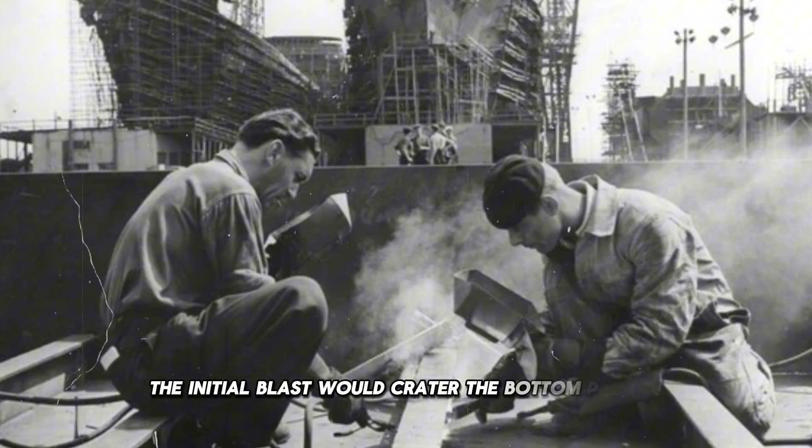By April 1944, salvage teams in the Mediterranean were seeing consistent patterns in how LSTs broke apart after mine strikes. The initial blast would crater the bottom plating, creating a hole between 6 and 12 feet in diameter. That was survivable if the ship's compartmentalization held. But the blast also propagated fractures through welded seams, particularly the transverse seams that ran across the hull. These fractures would race outward from the blast point, splitting seams that should have contained the flooding. Within seconds, what should have been damage confined to 2 or 3 compartments became catastrophic flooding of the entire forward section.

Salvage divers examining the wreck of LST-317 found that the mine blast had created a 6-foot hole in the bottom plating directly under the tank deck, but the fractures radiating from that hole had split 3 transverse bulkhead welds, 2 longitudinal seams, and the structural joints where the bow doors connected to the hull. The initial damage was survivable. The cascading weld failures made it fatal.

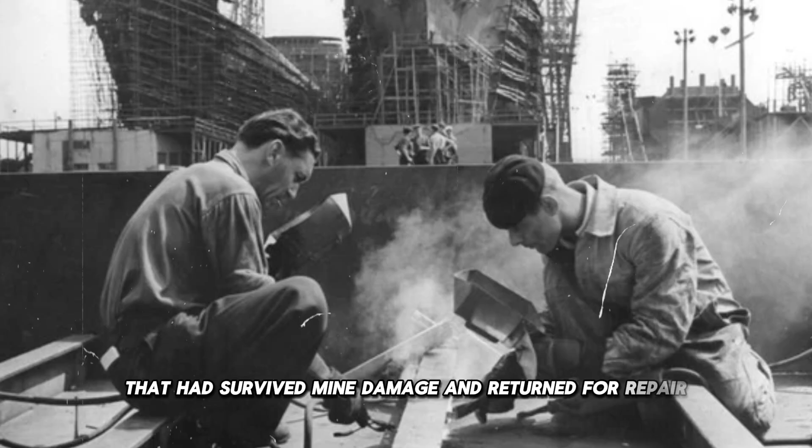Nobody was paying attention to a welding inspector at the Dravo Corporation shipyard in Pittsburgh who'd been documenting similar fracture patterns in LSTs that had survived mine damage and returned for repair. Thomas Hendricks wasn't a naval architect. He wasn't a marine engineer. He was a quality control inspector who'd worked in steel fabrication since 1936, and he'd seen something in the damaged LST hulls that the naval architects were missing.

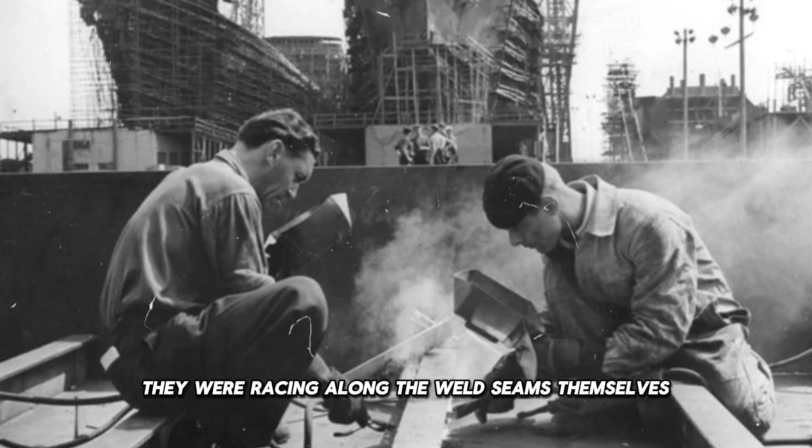The fractures weren't propagating through the base metal, they were racing along the weld seams themselves. That distinction mattered enormously. When steel plate tears, it usually follows the path of least resistance, which in theory should be the base metal away from the heat-affected zone around welds.

Welds are supposed to be stronger than the surrounding material. That's the entire point of welding. You create a fused joint that's metallurgically superior to mechanical fasteners. But in every damaged LST hull that Hendricks inspected between February and April 1944, the story was the same. The base plate would be intact. The welds had split. Not shattered from direct blast impact, but unzipped along their length, as if someone had drawn a zipper pull through molten metal.

He started measuring the fracture characteristics during his lunch breaks, using a machinist's scale and a notebook he kept in his coveralls. The split welds showed a distinctive pattern. They'd failed along the fusion line, the boundary between the weld metal and the base plate. This was the absolute worst place for a weld to fail, because it meant the weld hadn't truly bonded with the parent material. Instead of creating one continuous piece of steel, the welding process had created what metallurgists call a mechanical interlock, 2 pieces of metal pressed together but not fully integrated at the molecular level.

Hendricks knew this pattern. He'd seen it in bridge construction when welders worked too fast, in pressure vessels when preheating wasn't adequate, in structural steel when ambient temperatures were too cold. The root cause was always the same. The base metal hadn't reached proper temperature when the weld metal was deposited, so the fusion was incomplete.

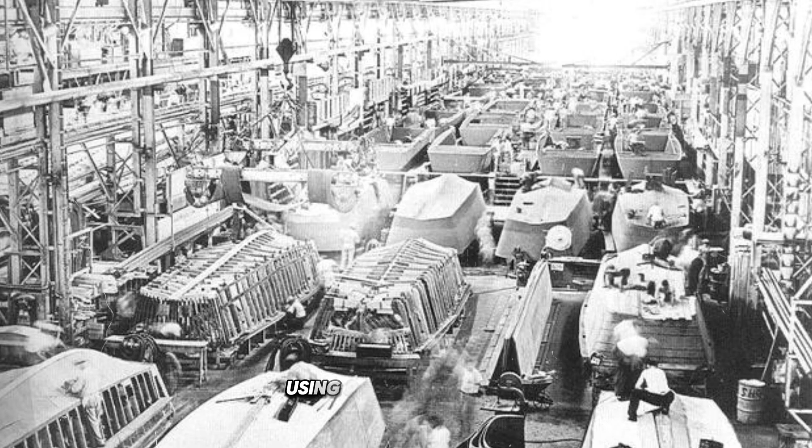Paxton and his 2 welders, Machinist's Mate First Class Donald Krebs and Machinist's Mate Second Class Joseph Atano, began the modification that evening after the regular workday ended. They couldn't pull 472 out of the loading rotation. The ship had to be ready for cargo operations during daylight hours. So they worked at night, using portable lighting in the suffocating heat of the sealed tank deck.

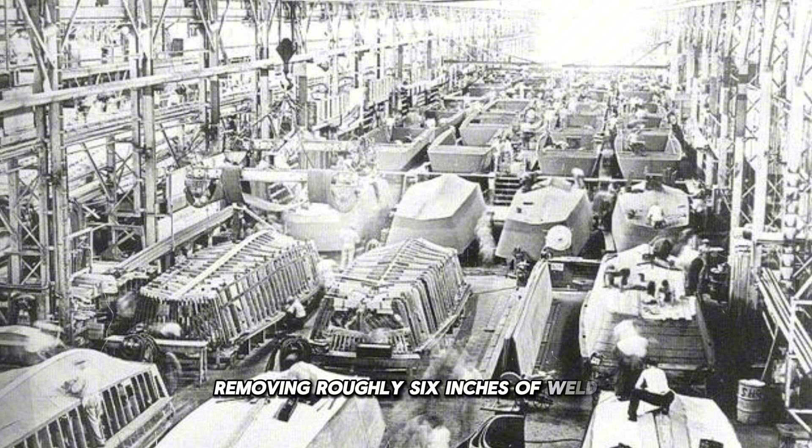The process Hendricks had described required precision that standard LST construction never demanded. First, they ground out sections of the existing fillet welds, removing roughly 6 inches of weld at 20-foot intervals along each bulkhead seam. This created test sections where they could apply the modified technique without completely re-welding 200 feet of joint.

Standard procedure for fillet welds called for preheating the base metal to 200 degrees Fahrenheit using torch heating. Hendricks's technique specified 400 to 500 degrees. Krebs and Atano used thermocouple pyrometers, instruments designed for measuring forge temperatures, to verify the base metal temperature before striking the arc.

The higher preheat temperature meant slower work. Steel takes time to absorb heat evenly. Rushing the process created temperature gradients that defeated the entire purpose. They'd heat a 3-foot section of bulkhead plating for 15 minutes, verify temperature, then begin welding. Standard single-pass technique would lay down one continuous bead and move on. Hendricks's multi-pass approach required 3 separate weld passes.

First pass, a root bead, using a smaller diameter electrode, deposited carefully to ensure complete fusion with both the bulkhead and bottom plate. Then a 15-minute pause to let that bead cool to between 300 and 400 degrees, verified by pyrometer. Second pass, a larger electrode building up the weld profile. Another 15-minute cooling pause. Third pass, a final cap bead that created the smooth external profile. Each 3-foot section of weld took 90 minutes compared to 15 minutes for standard technique.

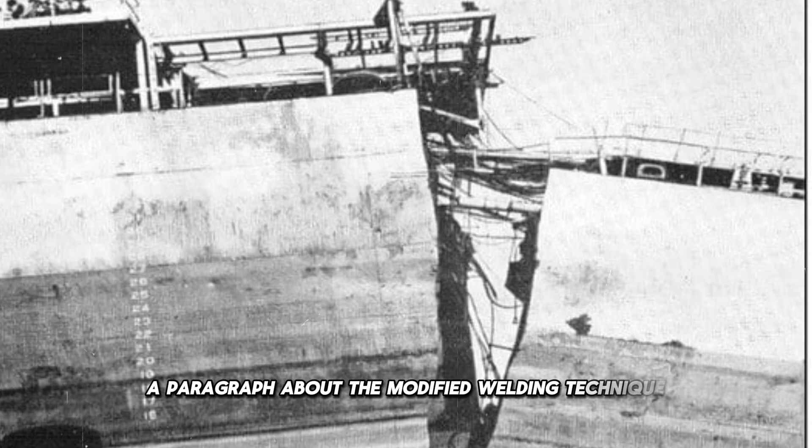Morrison wrote his after-action report on June 17th, while 472 was under temporary repair. He included a detailed description of the mine damage, the flooding control, and most importantly, a paragraph about the modified welding technique. He credited Hendricks by name, noted that the experimental weld sections had performed significantly better than standard welds, and recommended that the Bureau of Ships investigate immediate implementation across the LST fleet.

The report went through standard channels. Morrison's immediate superior, the commander of LST Flotilla 7, forwarded it to Amphibious Group 4 headquarters, with a notation that the welding modification warranted further investigation. From there it travelled to Commander Amphibious Force Pacific, then to the Bureau of Ships in Washington, arriving sometime in late July 1944, where it joined approximately 8,000 other combat action reports in a filing system that was 6 months behind on processing.

Morrison's letter to Hendricks, sent through regular mail in late June, arrived in Pittsburgh in early August. Hendricks took the letter to his supervisor at the Dravo shipyard the same day. The supervisor, a civilian production manager named Albert Krantz, read Morrison's description of 472 surviving a mine hit and immediately understood the implications. Dravo was currently building LST 513 through 528, 16 vessels, in various stages of construction. If the modified welding technique prevented catastrophic mine damage, those 16 LSTs needed to be built with multi-pass welds regardless of what Navy specifications required.

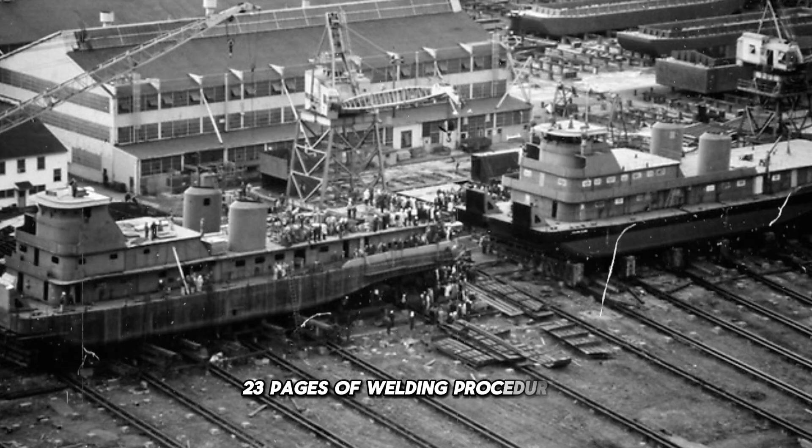Hendricks wrote the technical report in September 1944, 23 pages of welding procedures, metallurgical analysis, and field performance data. He included Morrison's combat report, photographs of the weld test sections from 472, and comparative analysis of fracture patterns in mine-damaged LSTs that had standard welds versus the modified technique.

The report was professional, thorough, and completely ignored by the Bureau of Ships. Not rejected, not evaluated and found wanting. Simply filed in the Technical Submissions Archive, where it joined thousands of other suggestions, modifications, and recommendations from shipyards, fleet commands, and individual sailors. The institutional machinery of wartime ship production was too massive to pivot based on field reports and suggestions. The Bureau of Ships had approved LST welding specifications in 1942.

Those specifications worked adequately, which in military procurement terms meant they weren't failing catastrophically enough to justify the disruption of changing them. LSTs were still being sunk by mines, but at rates that fell within acceptable loss projections. The production line was flowing smoothly. Changing welding procedures would require revising technical manuals, retraining thousands of welders, potentially delaying deliveries, and admitting that the original specifications were inadequate. The bureaucratic cost was simply too high.

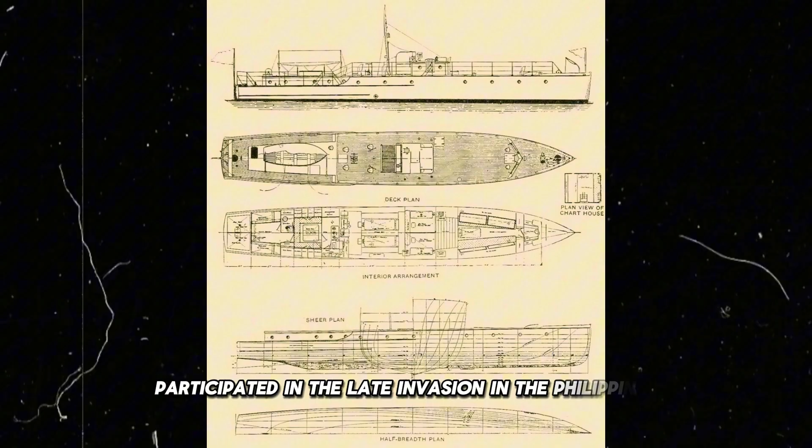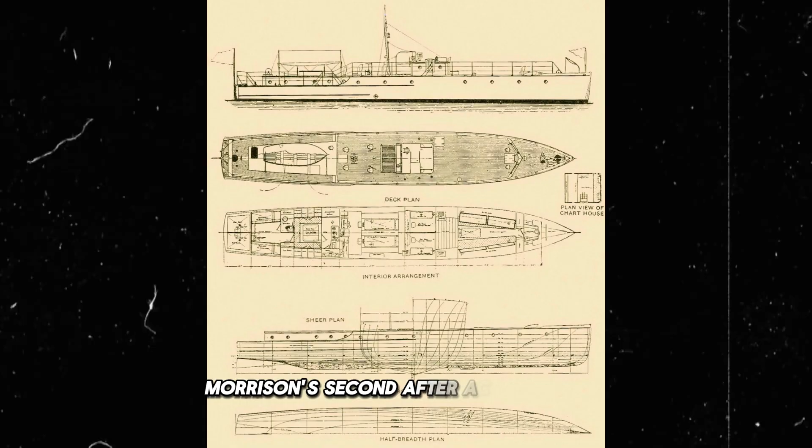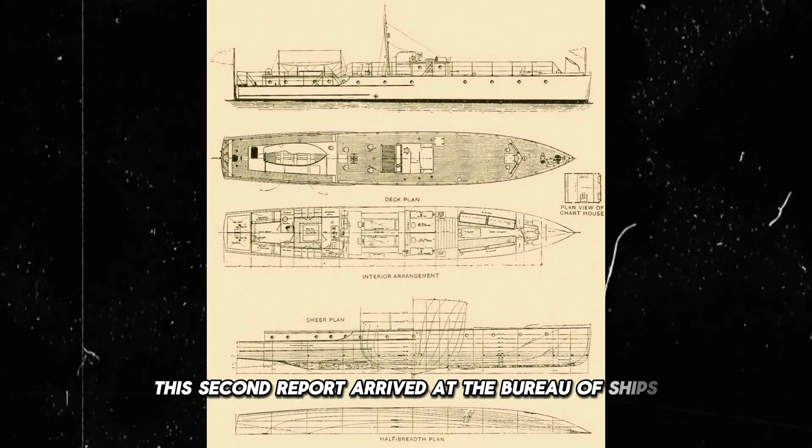By October 1944, Morrison's 472 had been fully repaired and was back in operation. The ship participated in the Leyte invasion in the Philippines, hit another mine off the beach at Dulag on October 23rd, and again survived with contained flooding because the modified bulkhead welds held. Morrison's second after-action report was even more emphatic than the first. Two mine strikes, two survivals. The welding modification worked. This second report arrived at the Bureau of Ships in December 1944, where it was filed next to the first one.

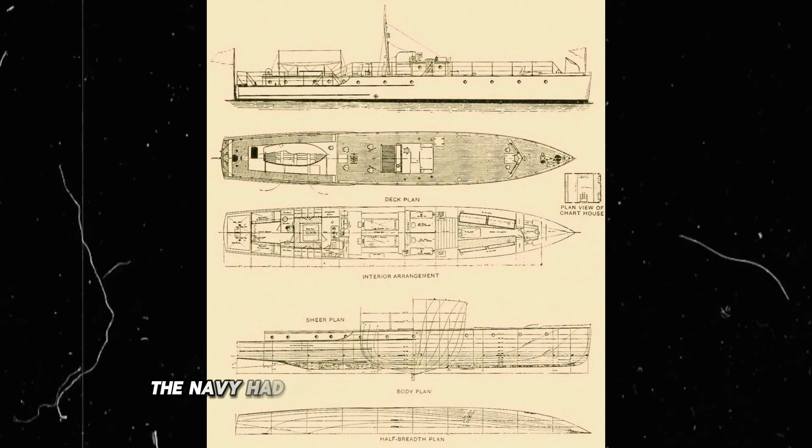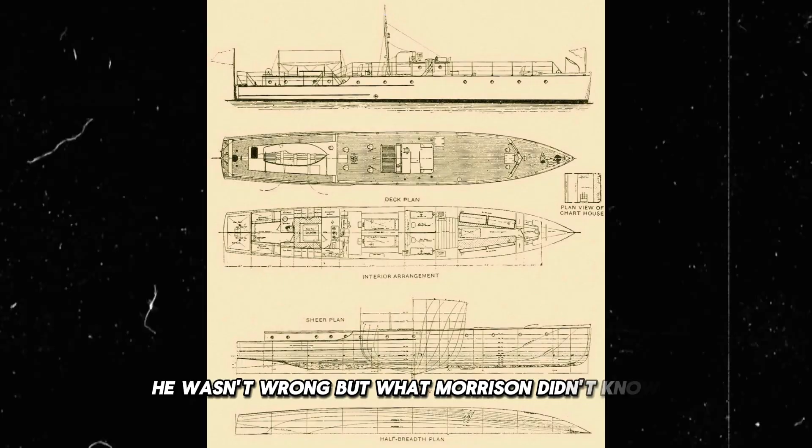By this point, Morrison was becoming convinced that he was shouting into a void. The Navy had a solution to LST mine vulnerability sitting in filing cabinets in Washington, and nobody was doing anything about it. He wasn't wrong. But what Morrison didn't know was that his reports were generating discussion in places that had nothing to do with official channels. Other LST commanders were hearing about 472's survival through the informal network that always existed between ship captains.

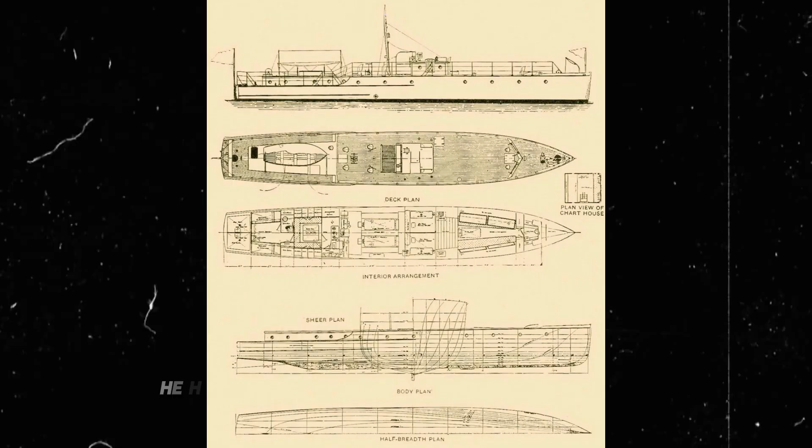By January 1945, at least 6 LST commanding officers in the Pacific had contacted Morrison asking for details about the welding modification. Morrison provided copies of Hendricks's original letter and instructions to anyone who asked. He had no authority to authorize modifications to other ships, but he wasn't going to withhold information that might save lives just because the Bureau of Ships hadn't officially approved it.

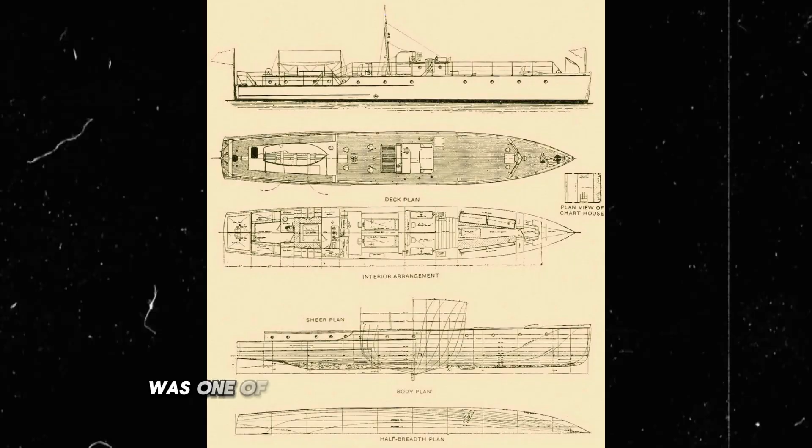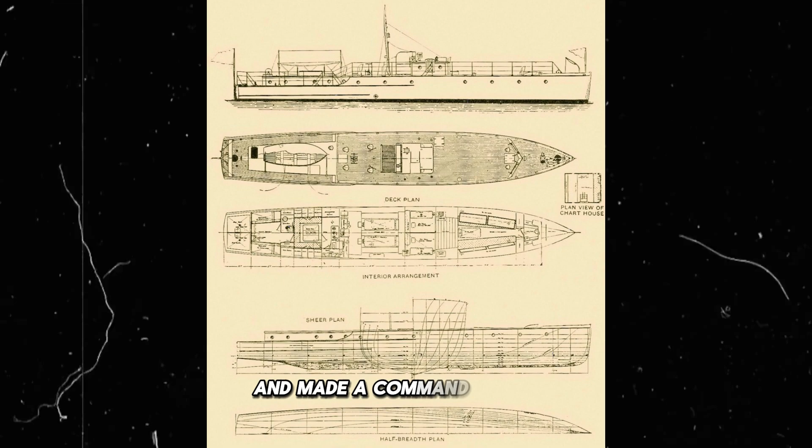Lieutenant Commander James Walsh, commanding LST 601, was one of the officers who contacted Morrison. Walsh's ship was preparing for the Iwo Jima invasion, scheduled for February 19, 1945. Intelligence estimates predicted extensive minefields on the Iwo Jima beaches. Walsh read Hendricks's instructions, discussed them with his chief engineer, and made a command decision. 601 would modify its forward bulkhead welds before the invasion.

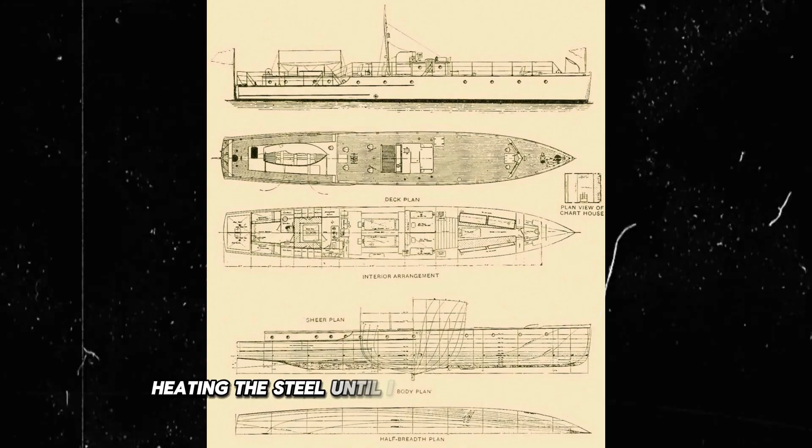Walsh's engineering crew worked through the first 2 weeks of February, re-welding bulkhead seams during the transit from Ulithi to the Marianas. They didn't have pyrometers, so they verified preheat temperatures by visual estimation, heating the steel until it showed a dull red glow, approximately 500 degrees. It was crude, but it was better than nothing.

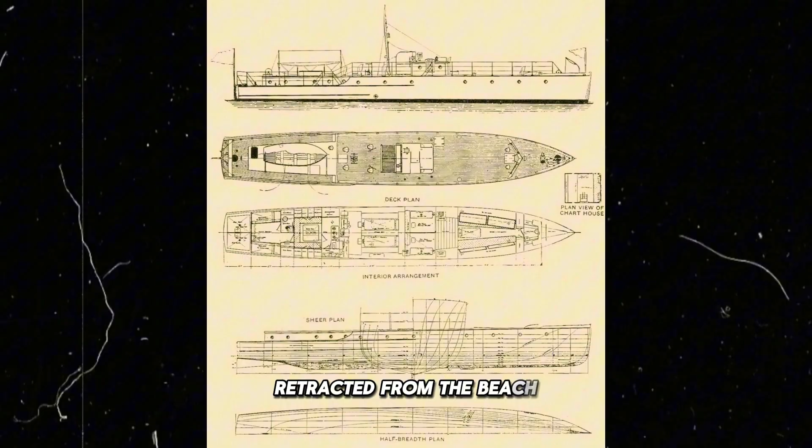LST 601 hit a mine on D-Day at Iwo Jima, February 19th, at 0914. The explosion occurred under the bow, almost identical positioning to Morrison's mine strikes. The bulkheads held. 601 completed its offload, retracted from the beach, and returned to service after temporary repairs. Walsh's after-action report credited the modified welds with preventing catastrophic flooding.

Lieutenant Commander Paul Harrison, commanding LST 722, heard about both Morrison and Walsh's experiences and modified his ship's welds in March 1945 before the Okinawa invasion. 722 hit a mine on April 1st at Okinawa. The modified welds held. The ship survived.

By April 1945, the pattern was undeniable. At least 12 LST commanders had implemented Hendricks's welding modification through unofficial channels. 7 of those ships had subsequently hit mines. All 7 survived with repairable damage.

Compare that to overall LST mine strike statistics. Between January and April 1945, 43 LSTs hit mines in the Pacific Theatre. 16 sank completely. 21 were damaged beyond economical repair. Only 6 survived with damage that could be fixed at forward bases. The modified LSTs weren't just performing better, they were surviving at rates that should have been statistically impossible.

The Bureau of Ships finally noticed in May 1945, not because they were paying attention to field reports, but because a statistical analyst in the Navy Department's ship loss analysis section spotted an anomaly. LSTs with certain hull numbers were surviving mine strikes at dramatically higher rates than the overall fleet average. The analyst, a civilian mathematician named Dorothy Reichman, started tracking down why. Her investigation led to Morrison's reports, Walsh's report, Harrison's report, and eventually to Hendricks's original technical submission from September 1944.

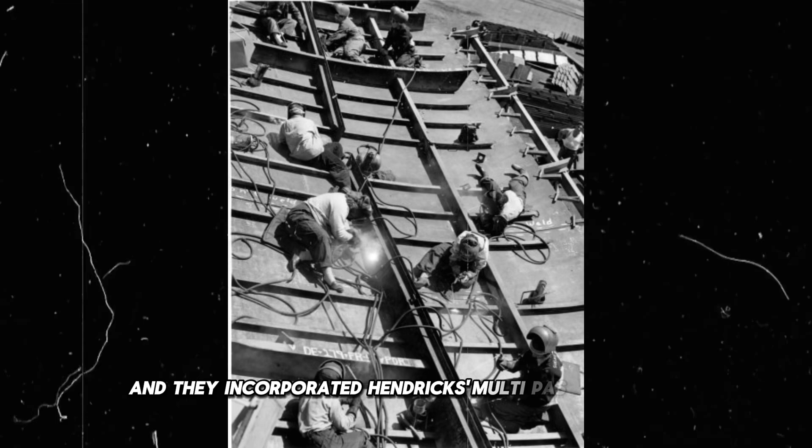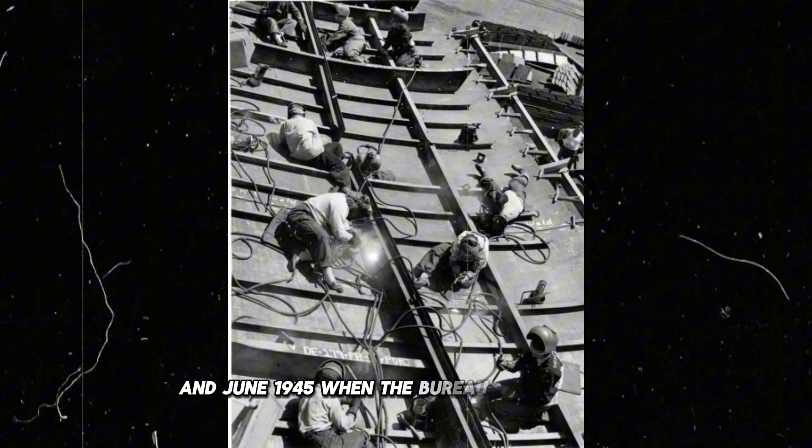The timing was both perfect and tragic. Perfect because roughly 200 LSTs were still under construction and would be built with the improved welds. Tragic because the war in the Pacific would end in August, meaning most of those improved LSTs would never face combat. And tragic because approximately 60 LSTs had been sunk by mines between September 1944, when Hendricks first submitted his report, and June 1945, when the Bureau finally acted. 60 LSTs meant roughly 4,000 dead sailors, killed in the 9 months it took for bureaucracy to acknowledge what combat commanders had already proven.

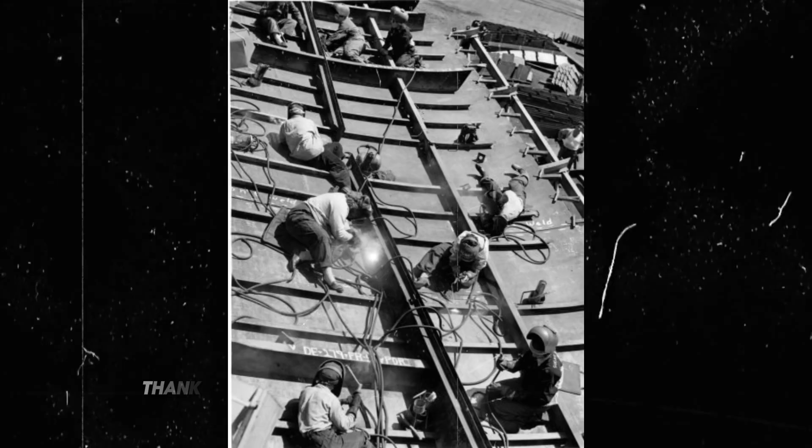Thomas Hendricks received official notification that his welding modification had been adopted in a letter dated June 28, 1945. The letter thanked him for his contribution to the war effort and noted that the Bureau of Ships had implemented revised welding standards based on his recommendations. There was no apology for the 9-month delay, no acknowledgement that earlier implementation might have saved thousands of lives.

Hendricks kept the letter in a desk drawer for the rest of his life. He never framed it, never showed it to anyone except his wife. When people asked about his war work, he'd say he'd been a welding inspector at a shipyard in Pittsburgh, nothing special.

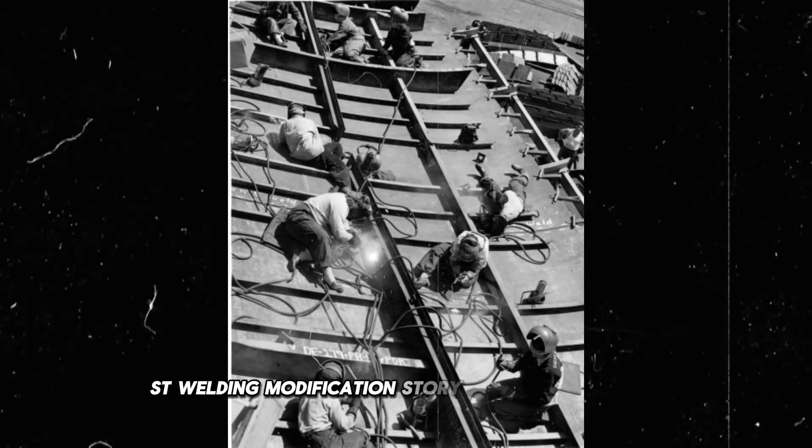The war ended in August 1945, but the LST welding modification story was just beginning. The technique that had saved ships in the Pacific would fundamentally transform how every welded vessel in the world would be constructed for the next 80 years. The immediate post-war period saw the United States Navy with over 1,000 LSTs in service or reserve. The Bureau of Ships faced a crucial decision. Should they retrofit existing LSTs with modified welds, or simply accept that older vessels had inferior construction?

The answer came from an unexpected source: insurance companies. Maritime insurance underwriters had been tracking LST loss rates throughout the war. By late 1945, actuaries at Lloyd's of London and major American insurers had compiled comprehensive data showing that LSTs built before June 1945 had fundamentally different risk profiles than those built after. The older vessels weren't just slightly more vulnerable, they were essentially uninsurable for mine risk operations without premium rates that made their operation economically impossible.

In January 1946, the Navy authorized a comprehensive retrofit program. Every LST remaining in active service or reserve would have its critical bulkhead welds modified using Hendricks's multipass technique. The program took 18 months and cost approximately $14 million. But it meant that the entire LST fleet, over 800 vessels, now had uniform survivability characteristics.

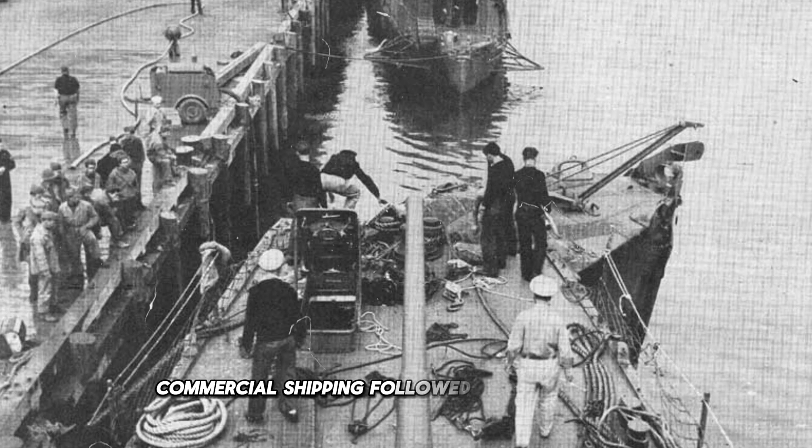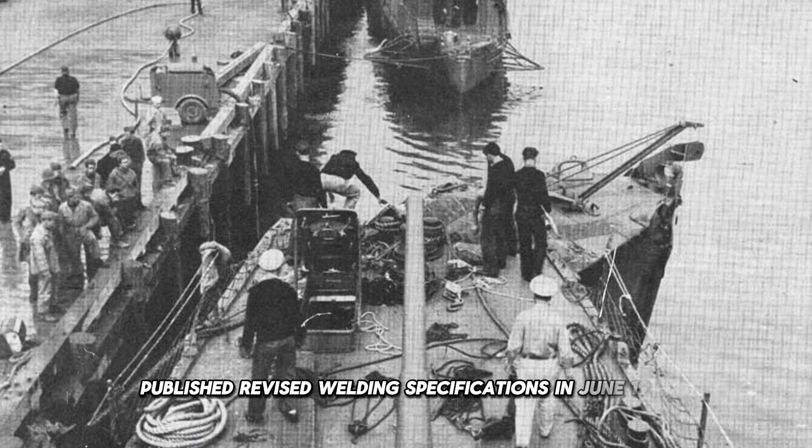Commercial shipping followed within 2 years. The American Bureau of Shipping, which set construction standards for merchant vessels worldwide, published revised welding specifications in June 1949. The revisions didn't explicitly reference LST combat experience, but the technical requirements were nearly identical to Hendricks's original 1944 proposal.

Preheat temperatures of 400 to 500 degrees Fahrenheit, multiple weld passes with controlled interpass cooling, specific electrode compositions emphasizing toughness over pure tensile strength. By 1952, every major maritime nation had adopted some variation of multi-pass welding for critical structural joints. The Norwegians, who led the world in tanker construction, made it mandatory for all vessels over 10,000 tons.

The Japanese, rebuilding their maritime industry after the war, incorporated it into their shipyard standards from the start. The Soviets, who'd received numerous American LSTs through Lend-Lease and had seen their performance, quietly adopted similar specifications for their expanding naval construction program. The technique's influence extended far beyond ships.

Structural welding in every application, bridges, buildings, pressure vessels, pipelines, faced similar challenges with shock loading and thermal stress. The principles that Hendricks had identified for LST hulls applied universally to any welded structure that might experience sudden impact or rapid stress changes. The American Welding Society incorporated multi-pass requirements into its D1 Structural Welding Code in 1954. The code governed everything from skyscraper construction to oil refinery equipment.

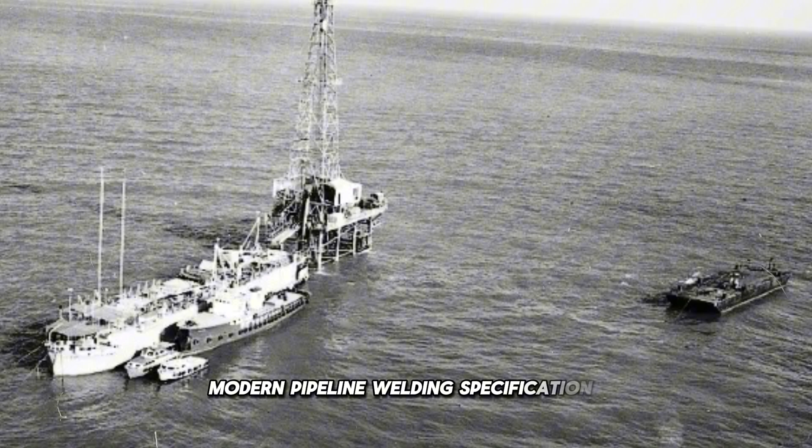Modern pipeline welding specifications require multiple passes, controlled cooling rates, and extensive non-destructive testing, all principles derived from understanding how welds behave under stress. The Trans-Alaska Pipeline, completed in 1977, used welding specifications developed specifically to handle Arctic temperature extremes and seismic activity. Engineers studied naval ship welding standards, offshore platform requirements, and World War II LST failure analysis when developing their procedures. The pipeline has operated for over 45 years, surviving multiple earthquakes and extreme weather events because its welds were designed to flex and absorb stress rather than fracture.

Bridge construction shows the same evolutionary path. Modern suspension bridges, cable-stayed bridges, and arch bridges use welded connections throughout their structures. The joints must survive wind loading, traffic vibration, temperature cycling, and occasional earthquake forces. Weld specifications for these structures explicitly incorporate thermal management and multi-pass techniques.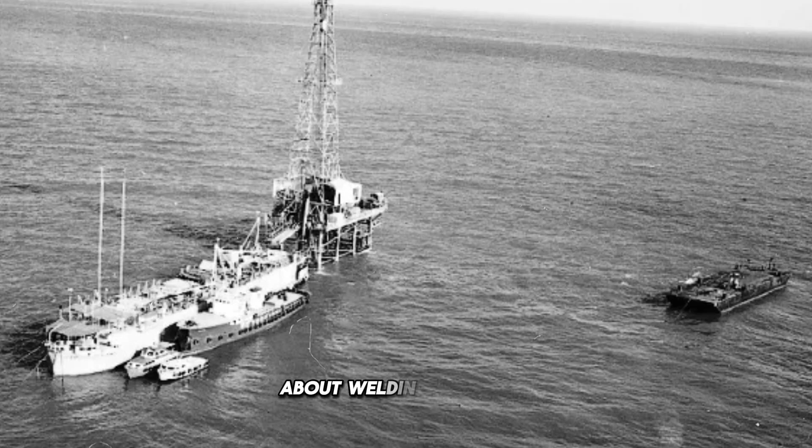The Tacoma Narrows Bridge, which famously collapsed in 1940 in part due to inadequate understanding of dynamic loading, was rebuilt with welding specifications emphasizing ductility and toughness. Engineers designing the replacement bridge in the 1940s consulted with naval architects about welding practices for structures subjected to oscillating loads. The connection between ship construction and bridge design was explicit and documented.

By the 1960s, structural engineers took for granted that critical welds required multiple passes with controlled thermal cycles. The principle had become so thoroughly integrated into standard practice that few engineers knew its origins. Textbooks taught the technique without mentioning LSTs, mine damage, or a Pittsburgh inspector's observations. It was simply how proper welding was done.

The space program inherited these principles when engineers began designing welded structures for rockets and spacecraft. The Saturn V rocket, which carried Apollo missions to the Moon, used welded aluminum construction throughout its massive fuel tanks. Those welds had to survive extreme temperature differentials, from cryogenic fuel at -260 degrees Fahrenheit to aerodynamic heating during launch.

NASA welding specifications for the Saturn V explicitly required multiple passes, even though aluminum welding uses different techniques than steel. The underlying principle remained constant. Proper thermal management during welding creates joints that survive shock loading and thermal stress. Engineers who developed those specifications had learned their welding metallurgy from textbooks and standards derived from World War II naval construction experience.

The International Space Station, assembled in orbit beginning in 1998, uses welded connections throughout its structure. While much of the assembly occurred in space using mechanical fasteners, critical pressure vessel welds were made on Earth using specifications that trace their lineage through decades of welding evolution back to fundamental principles established in wartime shipyards.